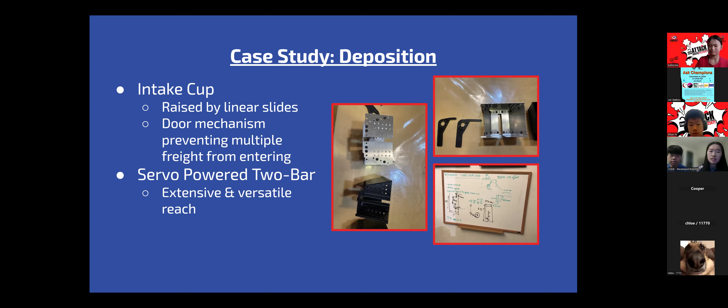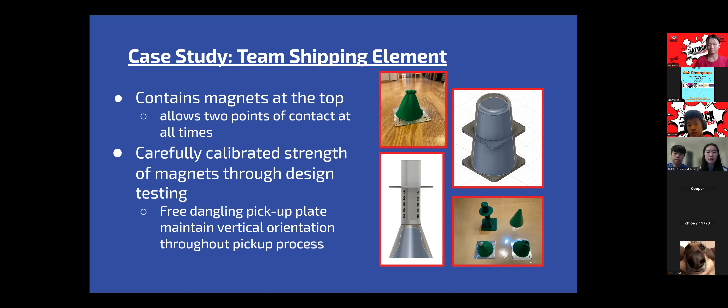So the most important part outside of the robot for us is the outreaching. We have two main types: community outreaches and technical outreaches. For community outreaches, we love helping our community, helping other teams, and more things like that.

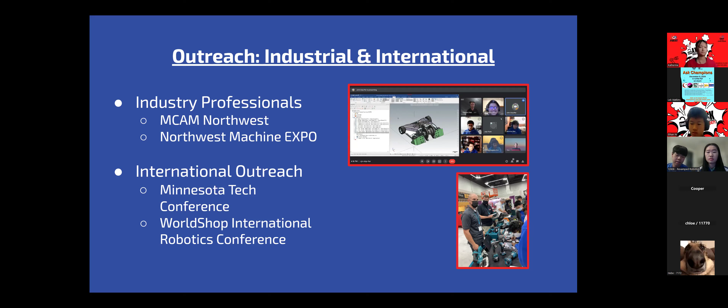Some key points that allowed us to be successful that year: our robot went through many different refined iterations, and through the implementation of our design cycle, which we continuously followed throughout the year, we were able to maximize and fully capitalize on our design. Lastly, the outreaches we did also really helped us be successful that year.

We were truly ambassadors of FIRST, and we aimed to spread FIRST all around the world. We helped over 20 different JFLL, FLL, and FTC teams, and also connected with 2,500 different people in 10 different countries. Thank you for listening.

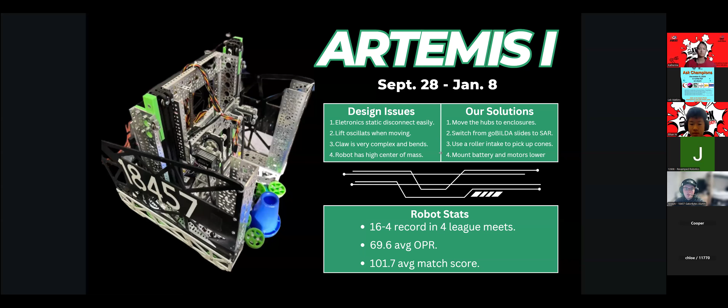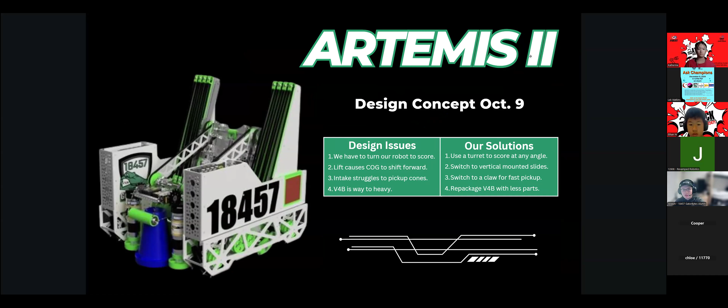We redesigned in CAD to our second iteration, which we never built. That was done beginning of October, and we did not like it, so we just didn't manufacture it - it was way too complex. Then we moved on to our third iteration, which is where we pioneered our turret design. There was some strategy we saw - we could stay away from the center line, which we saw early season would be a big advantage, so other teams couldn't interfere with our auto.

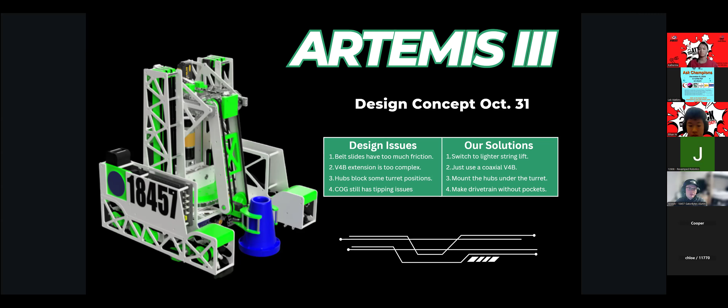And so then we kind of took a step back and refocused our robot. So what do we need to do? What are some of our actual engineering design decisions that we'd had to make? So we came up with four goals for our robot.

To stay away from the center line, we have to score all five cones from the side stack in auto, and we can't tip over the robot from driver error. Mechanically, being unable to tip over the robot was a big thing for us, and we needed to be able to score all the cones during teleop.

We came up with six or eight different points that were key design decisions that met those goals, and that helped us when going through our CAD. We were really focusing on what we could do in each area of the robot to make it better.

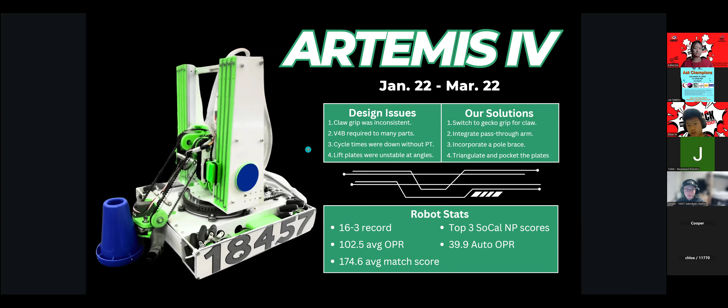That allowed us to design our fourth iteration robot, which is very simple. It was just a turret, slides, and an arm. We were able to win SoCal with that. It worked pretty well, had a 6 cycle auto, was pretty reliable, and had no real issues mechanically. The only thing was some flop in the arm that caused some issues, but we did that so we couldn't get hit and break an arm, which had been an issue we figured out earlier in the season.

And then we rebuilt for Worlds. After winning SoCal, we rebuilt our robot, made our vertical system a bit lighter, while switching to a pass-through design, so we weren't just scoring off the side of the robot. We're scoring out the back because we figured out we could do teleop faster that way, but our auto could still remain away from the center line with the turret, which was a big advantage for us.

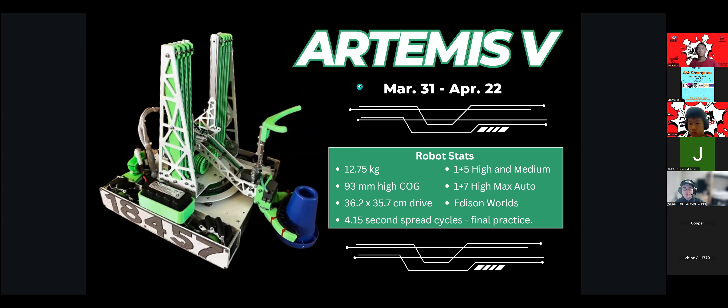Going into Worlds, we set up some different keys and tried to look at and see everything going in. What could we possibly do to give us an edge? We were able to look at a lot of the teams within Edison Division. We knew what everybody had going in, and we were able to build strategies up the week before, playing different scenarios out in practice to make sure everything was ready.

Going through our qualification matches, we went 8-3, only dropping 3 matches. We lost to Terabats, where we had a partner ranked really low, and then we lost to VC Silver Circuits, who ended up being the first place captain, and Auto Vortex, who was picked by the third place alliance as the first pick, with our partner ranked 48. Then we lost to 2 other teams with our partner ranked 43. However, we had some software discrepancies that caused issues on our robot during that match.

Our scouting was our biggest strong point as a team, so we scouted out Quality Control. We really liked their consistent auto, the best in the division, it basically didn't fail at all. We had them at our hotel for 2 nights of practice, getting stuff better, so we knew we worked well with them.

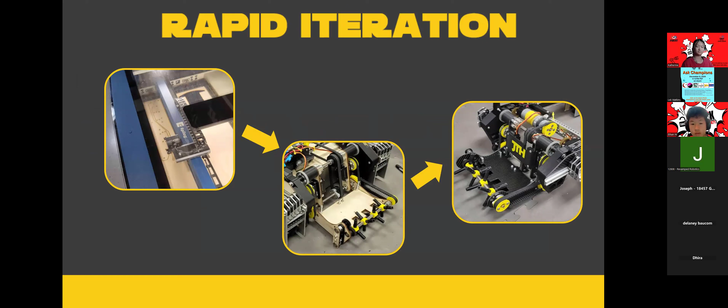When we're building a robot, the steps we take are: first we CAD our entire robot in Fusion 360, and then we have access to a laser cutter, so we first make a wood version of our robot - a full wood chassis - and then our final chassis material is carbon fiber. So this year we have a full carbon fiber chassis and extension that's on a pivot for intaking and scoring, carbon fiber slide inserts where we thread directly into the carbon fiber. Our intake has a wrist and tilt axis. We use surgical sutures for stringing, and we have a flip-down bumper system that helps us align with the wall.

So all of our features - we study other robots from FRC and other FTC teams from the past, and we take features from previous seasons as well. Our carbon fiber slide inserts we took from last season - we made this innovation in Centerstage. Our intake wrist and tilt axis, we took that system from last year, and the same with the string, and then we added all of the other innovations this year. So now Delaney and Natalie can talk more about outreach.

One of the main ways we like to do outreach is we inspire through camps and mentorship. We do a lot of camps like Robo Rumble, which runs about two months, every weekend, and we teach kids basic things they'd learn in, for example, FLL. We have them build with Legos and then code their robots. It gets them started in STEM and really influenced to pursue other STEM activities.

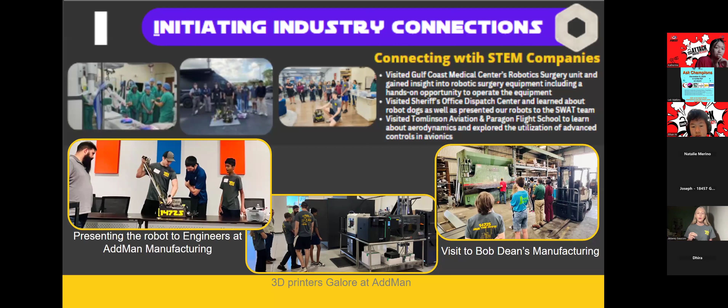We visited Bob Dean Manufacturing in partnership, and invited a team that we were mentoring. We like to do that quite a bit throughout our outreaches - invite other teams in our area, as they might not have the same opportunities that we do, since they haven't been around as long and don't have the same connections. So these sorts of events are very vital to what we do in outreach.

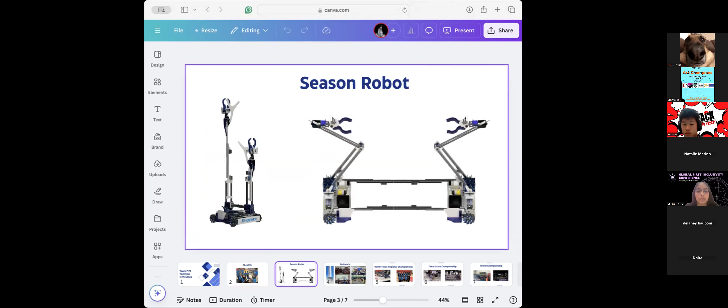Our Power Play season robot was called Phoenix, and one of the key points about it was it had a total of 13 feet of extension, and we used a multitude of sensors. Some key points about the hardware: we had 2 identical arms, and an industrial CNC gearbox running the first pivot, plus a few sensors that Hebe's going to talk about.

Our team's whole philosophy over programming is to program as much automation as possible to make driver control period, and also autonomous, as effective as possible. To do that, we have a lot of sensors implemented. On Phoenix specifically, that was our first year using the HuskyLens sensor, which we found and requested to be added into FTC. We wrote a driver for it, and it is now official in the FTC library, but at the time it was a customized driver.

The point of HuskyLens is its onboard computing, so we don't have to compute anything on the actual control hub. All we need to do is call to request the data, and it can do several different tasks, including object detection, April tag detection, and color detection.

We use this to center ourselves onto the poles to effectively score, on top of our presets that move the arms. Since we have two arms that we need to control, we used a coordinate system that we customized using potentiometers to know the degree of the arm we're at, and also presets that we record through a calibration program that we can run every time we reset the robot.

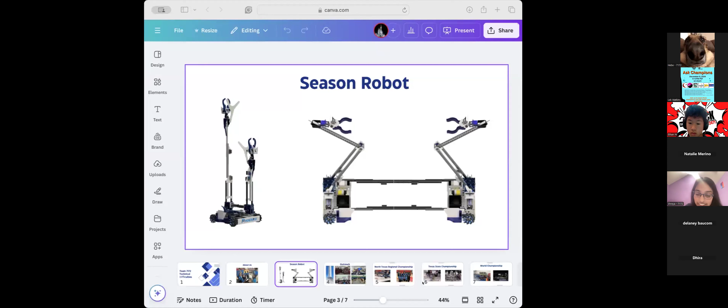As well as our hardware and software, we also focused on outreach in the Power Play season. We reached over 20 FLL and FTC teams through our work assisting and mentoring them. We also had key opportunities with companies such as SpaceX, getting to visit and present at their facility, and we hosted many scrimmages in our region. We also presented at local elementary schools and tried to spread FIRST as much as possible in our community.

For the North Texas Regional Championship, a little about our experience: we actually started out with another robot design, and this competition was a chance for us to try out a new two-arm design. It ended up working well for us, although we had some problems with defense, which led us to implement more strategies, like driving around more on the field rather than staying in one place and scoring our cones.

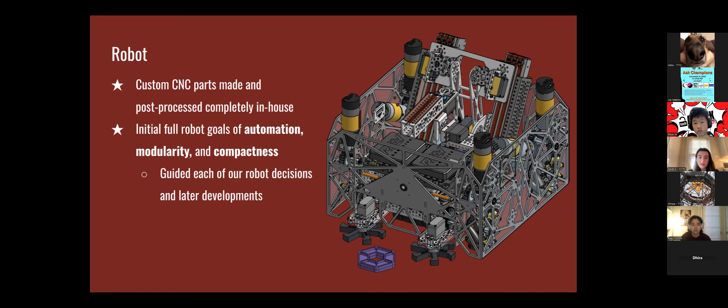This is a little bit more on our robot from last season. This is the Onshape screenshot—as Riley said, we use the CAD program Onshape to fully build our robot. We then moved to fabrication at the end of our season last year. Most of our robot was built out of CNC'd aluminum and polycarbonate, which you can see in the image. Every season we pick a few core design principles that help us build our robot and keep them in mind throughout. Last year that was automation, modularity, and compactness, and that really helped shape every design choice we made.

Our team connects with multiple STEM professionals from around the world. We typically reach out in a variety of ways, such as personal connections like parents and friends, connecting via Instagram, or even finding profiles on LinkedIn and cold emailing. We don't always get a response, but people who have responded are extremely kind and willing to give us advice about careers after FIRST and applications of robotics in real life.

We've been able to connect with companies like NASA, Northrop Grumman, JPL, Aerospace, and Nation Builder, and we highlight this in our judging presentation—specifically how we've learned and grown from their advice, which is how we were lucky to get the Connect Award at our qualification tournament.

Additionally, we have a strong network of alumni from our team who are always willing to give us advice on how to solve problems with the robot or give us feedback on our judging presentation. We've been so lucky to have our former team members come back and provide us with their wisdom. We've also connected with FTC teams from around the world, including Australia, Brazil, Turkey, Greece, and Kazakhstan, and fostering these relationships allowed us to gain invaluable advice from other teams, as well as offer advice of our own.

Our team loves to engage with our local community in a variety of ways. Two important components of our outreach are longevity and impact. Some ways we've showcased these are by starting and funding an FLL team at a local community center, where we visit weekly to coach them on how to build, code, and create a robot, and how to be well suited to compete in a real FLL competition. We funded this FLL team through our team bonding bake sales, which allowed us to purchase the FLL fields as well as the robot kits and registration.

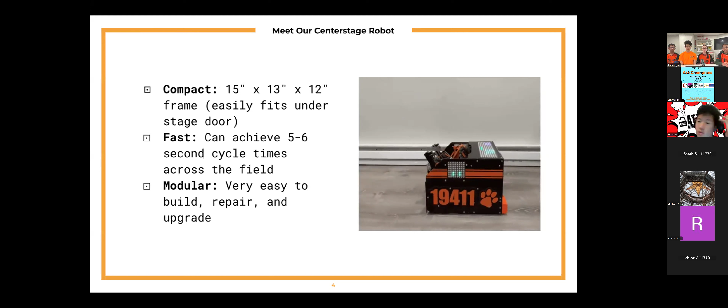Last year's robot had a pretty compact 15 by 13 by 12-inch base that allowed us to quickly move around the field. That, with our fast intake, meant we could have a pretty quick cycle time. Our dropper was able to rotate along 3 axes and could drop pixels either 1 at a time or 2 at a time in either a horizontal or vertical orientation.

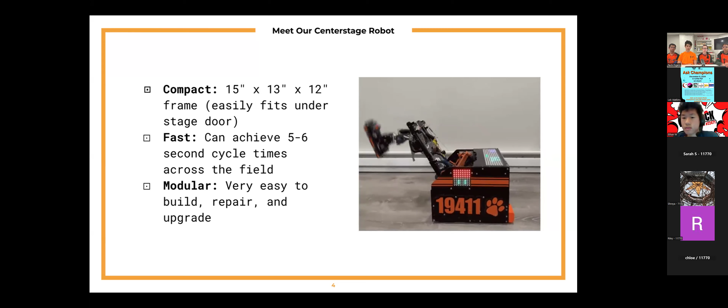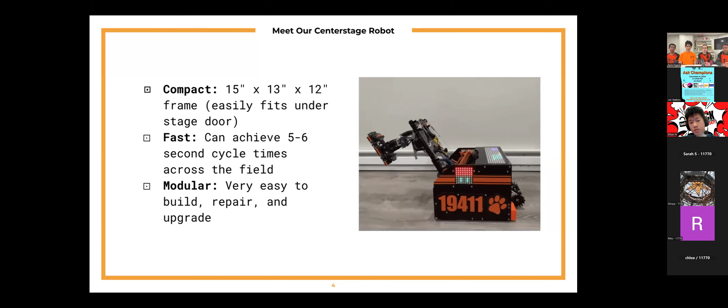A huge part of our robot that we really wanted to emphasize was our modularity. In past seasons, we had a lot of trouble switching out different subsystems, such as the intake or the dropper quickly, especially at competition if something broke. So we wanted each element of our robot to be modular, meaning the whole dropper could be taken off with only a couple of screws and really quickly.

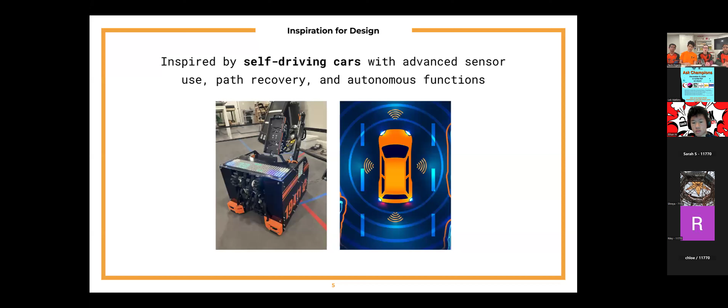Our entire robot design was also inspired by self-driving cars because we had a lot of sensor use and algorithms in our pathfinding system, which Rishi will get into later, that helped us achieve the overall functionalities of our robot.

As Amelia mentioned earlier, this was one of our key innovations last year: our driver dashboard. This is basically just an array.

It was three different LED boards, one on each side and one mounted on the top of the robot, that you can see here. It's controlled by an Adafruit driver, and each of the 384 LEDs on our robot was able to be individually controlled. So what we would do is take in data from the robot, such as the data that the color sensors read when they were facing towards the dropper. And on the edge of the top board, we would actually light up the pixel colors as they would come in, so this would allow the drivers to see information they weren't able to see before.

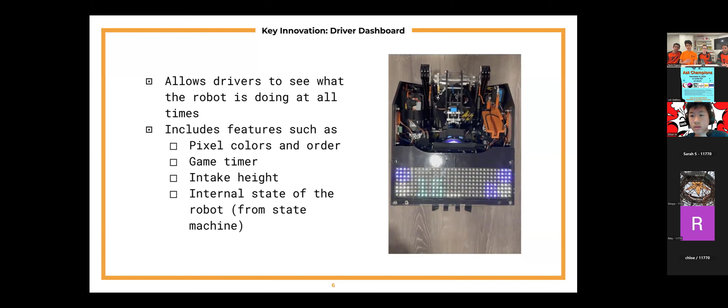We also have other things on here, like the intake height and a game timer, so the drivers don't have to look up and can focus on the robot game.

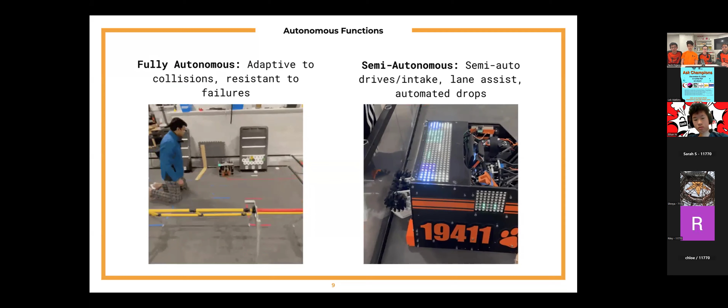In addition to our Pathfinder LEDs, we pride ourselves on creating a lot of autonomous and semi-autonomous functions to make the autos better, as well as making the teleop better. On the left is another example of Pathfinder, showing how the robot adapts to collisions. We have conditions to make sure the dropper doesn't get stuck, and a lot of autonomous capability built in to make sure we have a resilient robot.

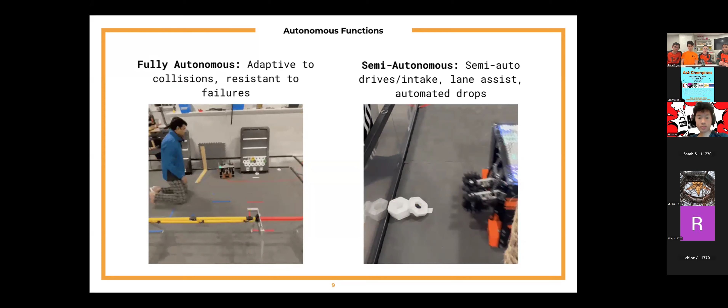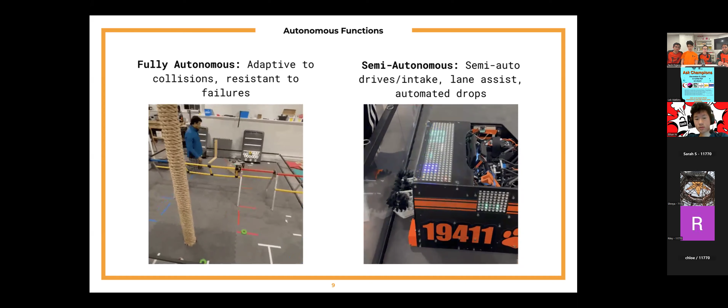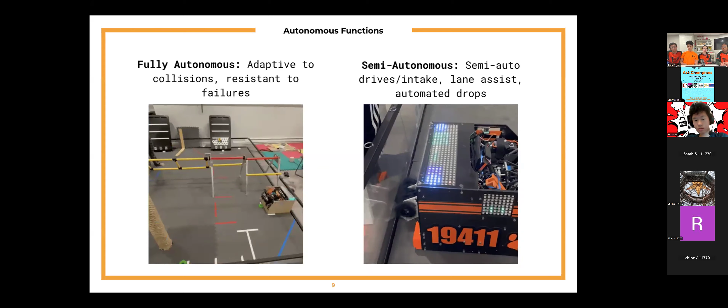On the right-hand side, you see some of our semi-autonomous movements, including our semi-autonomous intake, which used color sensors inside the robot to detect when we intake pixels and automatically stop the intake and bring it up. We had lane assist, which allowed us, when driving, to latch onto one lane using odometry, keeping us on a lane and not hitting the truss while driving. We also automated our button presses to go out to drop positions, which helps save time for the drivers.

To do all this, we need a lot of sensors. We had 3 color sensors, 1 on the dropper and 2 inside the robot. The one on the dropper was to detect the backdrop, so we could move close enough to drop. The 2 inside the robot were to detect when pixels were in the robot and what color they were, for the LEDs.

We had 2 distance sensors in front, which allowed us to have accurate stack intakes. We had a camera so we could detect AprilTags on the backdrop and relocalize ourselves based on that, accounting for dead wheel odometry drift. We had an external IMU because we thought it was more accurate than the one on the controller based on our testing. We used the motor encoders for accurate slide positioning.

Dijkstra's algorithm was used for Pathfinder, and we used that in our Pathfinder system with waypoint-based trajectory generation to create our paths.